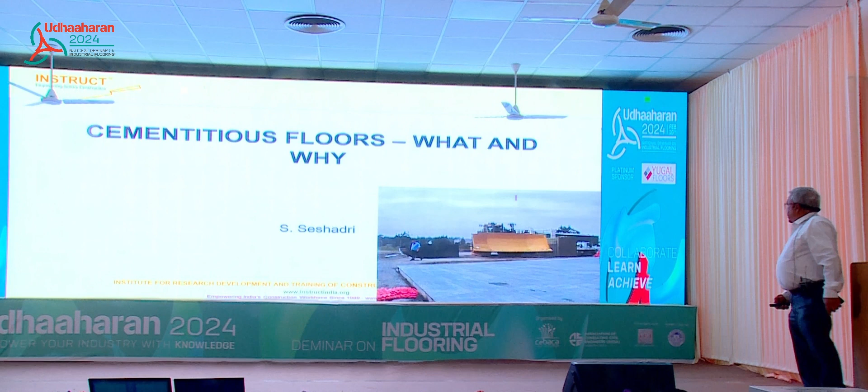So, my topic that has been given to me is to talk about fiber reinforced concrete, aggregate screed, hardness screed, and so on. All the cementitious things. We are going to talk about it. Now, why do we need to use all that? Because if the floor is damaged, there is a lot of strain in cleaning, damage to vehicles.

There's a classic case. You would have heard of one company called Sylvania Laxman, which used to make tube lights. I don't know whether it's still there. So in one of their plants, the forklift was carrying all the packed tube lights, and there were a lot of potholes. The driver was carefully going, but at some pothole he was not careful. Many tube lights fell from the forklift and they broke.

Recently, the Toyota car company in Bangalore, one of the reasons they want floors to be smooth is because the forklift drivers are complaining about backache. They said because we keep driving the forklift, that jump and bump is causing serious back issues, and they're taking health leave. It has become an issue there.

So all those industrialists and consultants here may please take note of it. Floor has got a lot more to do. We don't want to give backache to our forklift drivers. Right. Another thing I forgot. I showed one red ring. The tires get damaged. Forklift tires wear out more when the floor is uneven.

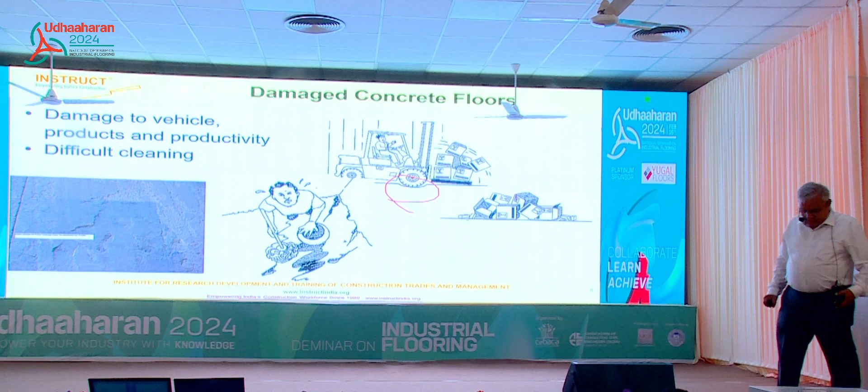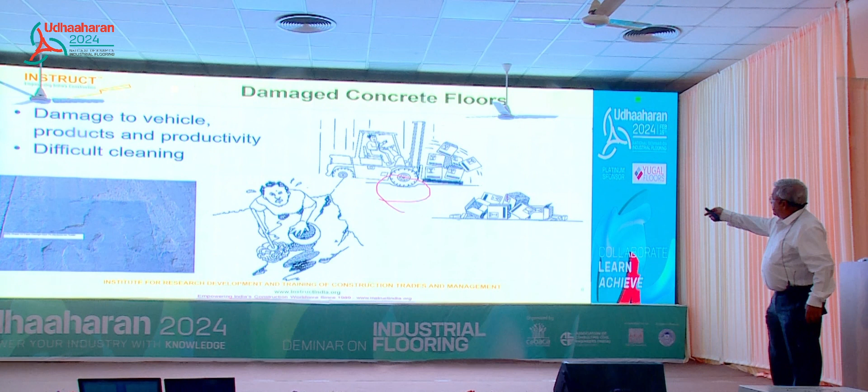Okay, most of us know VDF floors. As somebody was saying, there was a practice that whenever concrete is laid, VDF, vacuum dewatering, is done. And why did VDF come into the picture? It is about 100 years old technology, not new. Because when the concrete floor is laid, for workability they used to use more water.

Cement requires only 0.38 water cement ratio for complete hydration. But 0.38 water cement ratio concrete is stiff. When VDF came into the market, there was no technology of superplasticizer or plasticizer in the market. Admixture technology had not grown. So VDF came into the picture.

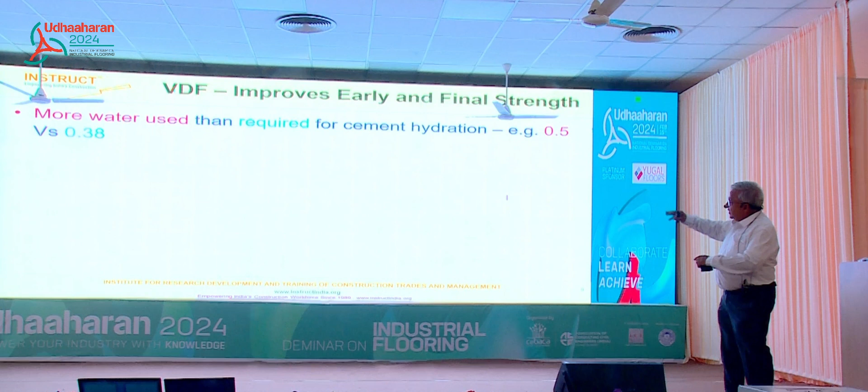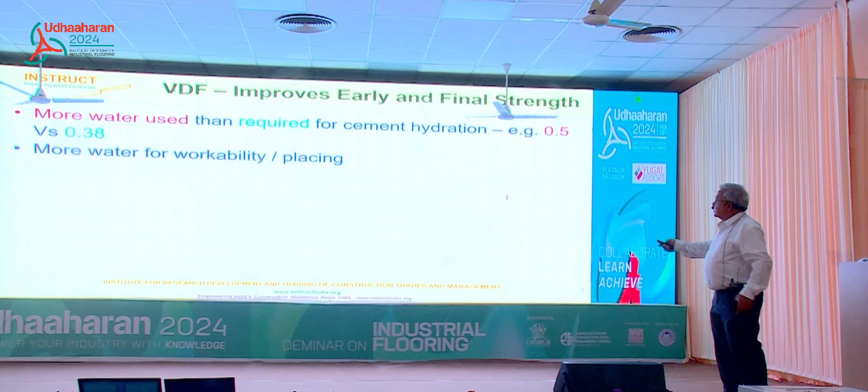So because the water was high, they used to suck away the water. Why? Because more water was used for workability, but the more the water, the more strength will drop, and we cannot afford to lose strength on the floor. So vacuum dewater, suck away the water. The water cement ratio will come down and you have got a strong floor. That's how VDF came into the picture.

What is the risk involved? Excessive suction. There are formulae that if the concrete is so thick and you use so much water cement ratio, you should run the vacuum for so much time. But 90% of the VDF installers are not aware of it. Many of them don't follow it correctly. What is the result? They suck away more water. There is no water left for hydration of the cement, and the concrete becomes very weak.

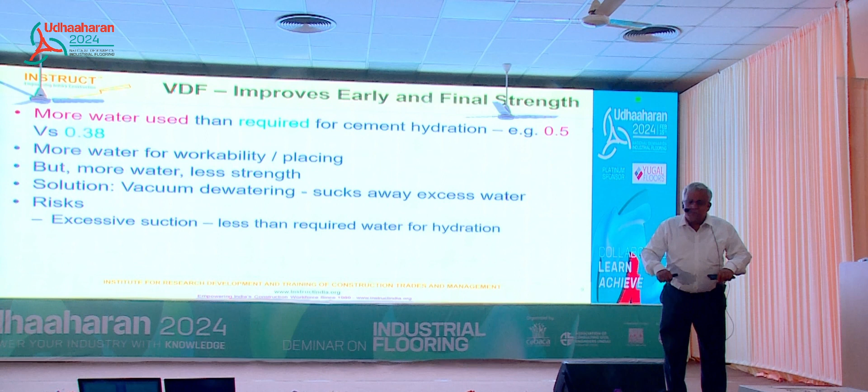In Bangalore, many of you have gone to Koramangala, there is a Forum Mall. In the Forum Mall parking lot basement, they had a serious issue when it was under construction. They called me, the floor is getting damaged. I went and checked. At that time, one contractor's manager came in a Bullet motorcycle, and the tire print happened on the concrete floor. I'm not exaggerating. The concrete got like clay. It was so soft.

Why? Because the vacuum dewatering operator, it happened in the night, went to sleep. And it went on sucking for how long, God knows. And there was no water for hydration. So excessive suction is one problem.

And the second problem with vacuum dewatering is, when the water is sucked, it makes pathways from the bottom of the concrete to the top of the concrete. We'll have beautiful pathways. At a later date, especially if it's a grade slab, rising moisture can happen.

And very risky, we should not attempt dewatering. It is not required. Ready-mix concrete plants supply concrete at a water cement ratio of 0.43, 0.44, 0.45 kind of thing. No need for dewatering, vacuum dewatering. It is one operation wasted.

Nowadays everybody gets concrete from RMC plant. All that one has to ensure is, you make concrete with a water cement ratio of less than 0.45. Usually it will be there. No need for dewatering, and it's dangerous for the concrete.

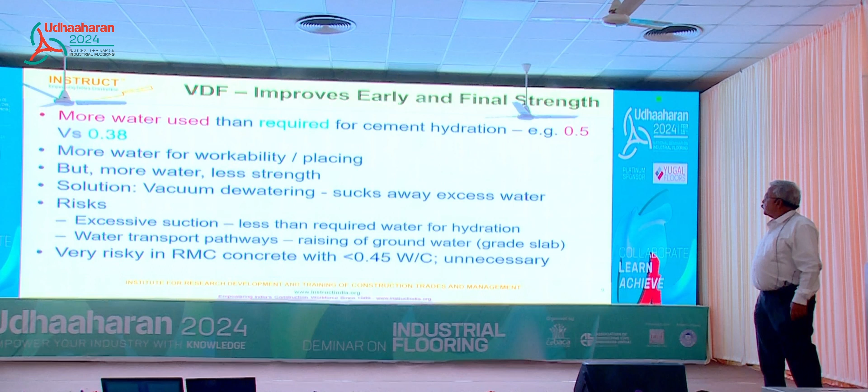Even very recently, in one of the factories, somebody had installed the epoxy floor, and they had done vacuum dewatering. Everywhere they had done it properly, but one particular part of the floor was excessively dewatered, and it had caused a water path. Heavy rains were there, water started coming up, huge blisters formed in one of the industries. So be careful about vacuum dewatering.

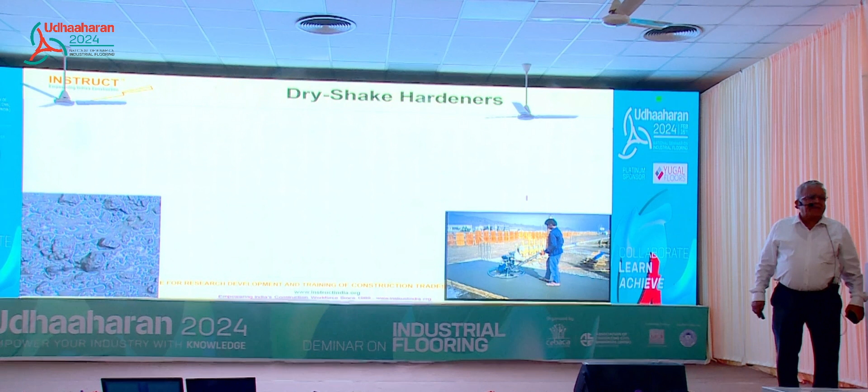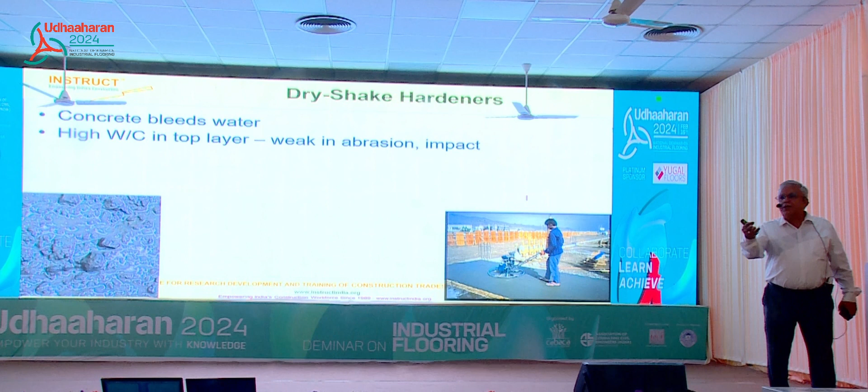Then dry shake hardener. Whenever we lay concrete, however well we make it, there will be some bleed water. So when bleed water is there, the top layer of the concrete will have a high water cement ratio. What is high water cement ratio for us? Low strength. So it's weak and it gets worn out very quickly. That's why dry shake hardener came into picture.

When the concrete is still green, when the bleed water has just evaporated, you just sprinkle it and float it. The dry shake hardener contains cement, some chemicals and some aggregates. These aggregates can be corundum, quartz, or different types of aggregates. Each will have different hardness, and based on the kind of aggregate, it will give you that level of abrasion resistance.

Number one, the water cement ratio that has gone up due to bleed water, that bleed water will be utilized by the cement in the dry shake hardener, and the hard aggregates will give you abrasion resistance. So, a two-way attack, it will make the concrete more abrasion resistant. That is a dry shake hardener. And actually it started with corundum.

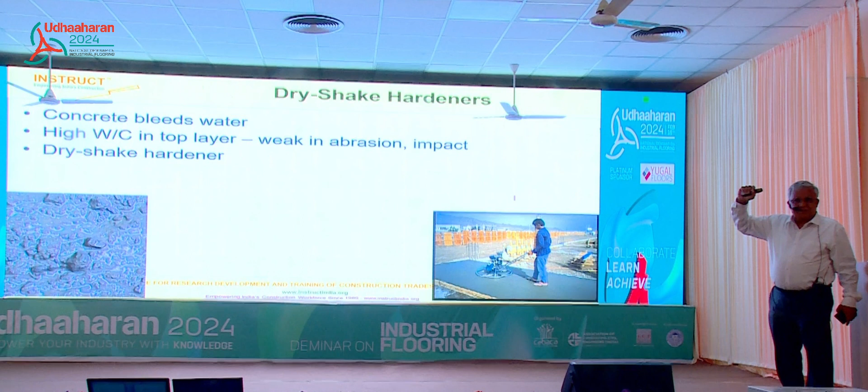You would all be familiar with the Mohs scale of hardness, 1 to 10. 10 is diamond. That is the hardest material, then comes corundum, then comes something else. The lowest, weakest material is number 1, which is talc. So we should check what kind of aggregate they have used, what is the hardness of it, and what kind of load.

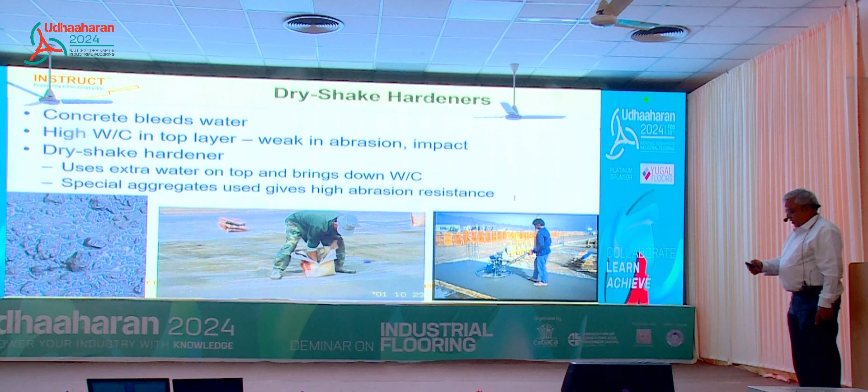Okay. And it's very easy. It's a very crude way it's being done, but still, with a skilled hand it is effective, by hand sprinkling and then troweling. This is the dry shake hardener. The next cementitious floor topping material, we talked about dry shake, and then of course this is also cementitious concrete, only some fibers to improve the concrete properties.

Then there is one very interesting product called metallic aggregated screed. It's about 15-20 mm thick. It can be installed both on green concrete as well as on old concrete. What does it do? It is extremely abrasion and impact resistant. Very high abrasion resistant, very high impact resistant.

In fact, it has been used for earth moving equipment on the test bed. For its traction, when it takes a turn and all that, it makes a lot of abrasion, but it is used there. It is used on the spillway of the dam. Why? Because in the spillway, when the water is flowing, it carries some boulders and all that. It keeps falling, and that impact is absorbed. It is a cementitious material.